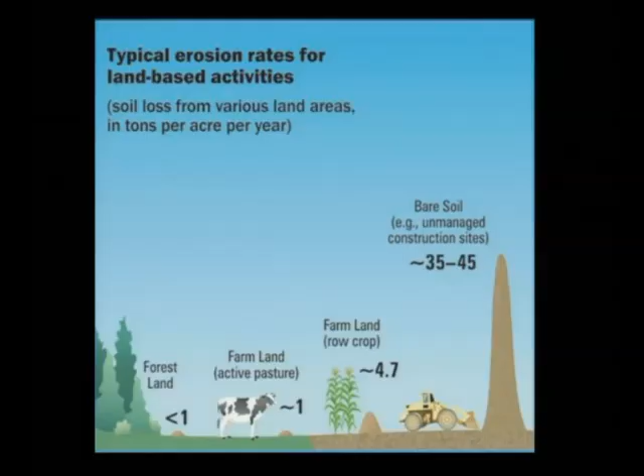What we found going forward is that this did not solve all the problems. We were seeing improvements, but it was not addressing some big problems that continued. I put up a slide here that shows typical erosion rates for land-based activities. This is something that EPA put together. And what they found is that bare soil from an unmanaged construction site can contribute large amounts of sediment into water bodies, which can contribute to pollution, impact aquatic life, that kind of thing.

So with that in mind, Congress expanded the Clean Water Act in 1987 to include stormwater runoff, specifically from construction sites, although some others were rolled into that as well. We're going to focus on the construction activities today. With those changes, it required a permit for the runoff from construction sites. Initially it was 5 acres. They phased that in and then dropped it down to 1 acre, and that's where we're sitting today. So with all of that, any construction sites disturbing over 1 acre of soil need to have a permit as required by the Clean Water Act.

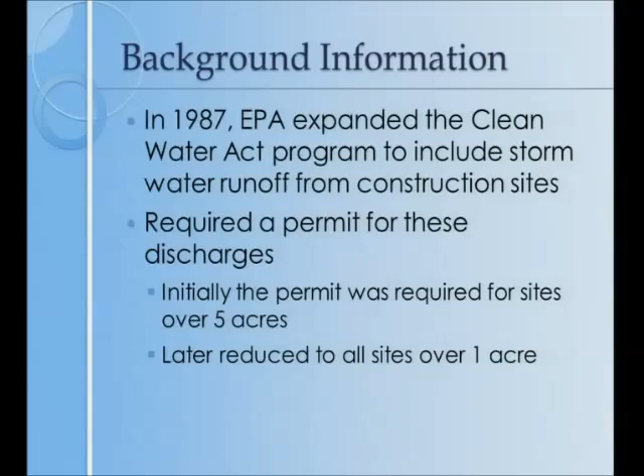One of the provisions of the Act also is that states could take over this program. So in 1993, South Dakota obtained delegation. We obtained the authority from EPA to implement this program ourselves. We felt that the state was in the best position to work with our own construction sites, our own permittees, and our public, to be more responsive to the public. We felt it was important to have that local control. So in 1993, EPA turned that program over to the state.

One of the requirements is that EPA provides oversight. They have to make sure that we're issuing our permits appropriately. And so we have to make sure that any state-issued permits comply with both South Dakota's own surface water quality standards, our state requirements, as well as some federal effluent guidelines that EPA has passed. Those federal guidelines were established to provide a uniform playing field, so that you couldn't go to one state and get a better deal pollution-wise than another state. So we've got both federal requirements we have to comply with, as well as our own state standards.

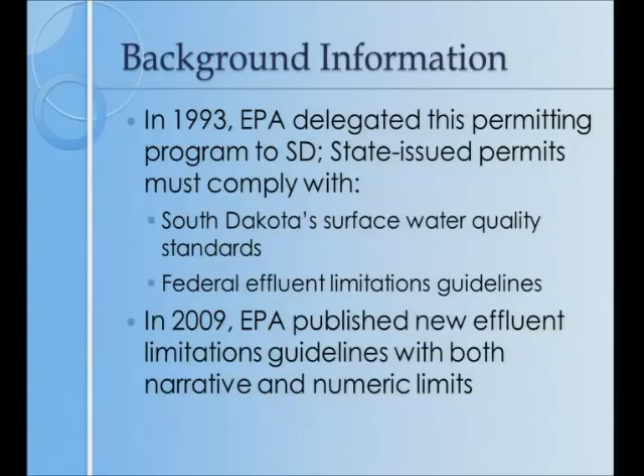I mentioned that because some of the provisions we're going to talk about today are based on one or the other. In 2009, EPA published effluent guidelines for construction sites, which included both narrative and numeric limits. EPA put some numbers that a construction site had to meet, as well as narrative limits explaining what you need to do. EPA was sued on this permit and ultimately withdrew the numeric limits, so in 2014 they finalized the narrative effluent limits. Since those are nationwide minimum federal requirements, we are required to have that in our permit.

So, in January 2015, our permit expired. We've administratively extended coverage and we're still operating under that, but we need to get that new permit reissued, and that's why we're here today. So we're in the process of reissuing that permit, and we need to incorporate those new federal requirements into our permit.

With our construction general permit, the types of discharges covered are stormwater from construction sites greater than 1 acre. It also includes construction support activities, such as staging areas or stockpiles off the construction site that have soil disturbed as part of that. It also covers a larger common plan of development - say a developer has a 20-acre site and breaks it up into quarter-acre lots. Those individual lots are under the 1 acre size, but that larger common plan of development pulls those in because they can certainly be a source of pollution.

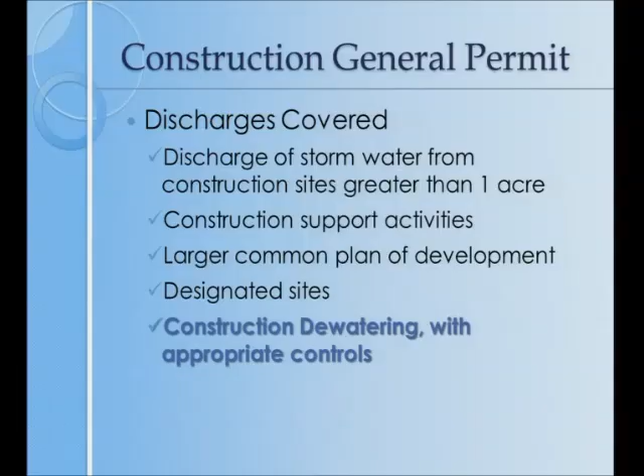The department also has the authority to designate a site, so if we see something smaller than 1 acre that's clearly causing problems, we can require that permit. We use that very sparingly, but we do have that authority and have occasionally used it. One change in this permit is that construction dewatering will be covered as long as appropriate controls are in place. That is one change from the existing permit.

Some things not covered by this permit: post-construction discharges. If you're building a wastewater treatment facility, the construction does need to be covered under this permit, but once construction is done and that treatment facility is operating, you'll have a different permit for that - this no longer covers it. This permit also does not address dredge or fill activities, such as from Section 404 permits; you need a separate permit from the Corps of Engineers for that. We're not going to authorize a discharge that would threaten water quality, or a discharge of a regulated substance such as a spill, or one that would threaten an endangered species. None of these are new - this was all exempted by the current permit, but I'd like to point that out.

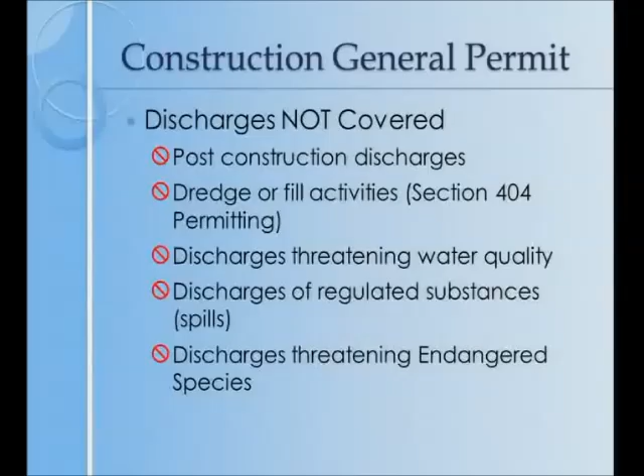Just real briefly, how you get coverage: you're required to submit a notice of intent, which is the application for getting coverage under that permit. Before you submit it, you have to have a stormwater pollution prevention plan developed. That plan is how you're going to comply with the permit at your particular site. It's supposed to be a living, breathing document that changes as construction goes on, but you need to have it developed before you submit the notice of intent.

One thing we're proposing to change with this permit is that we're going to start accepting the notice of intent applications by email. We're not going to require that hard copy any longer. I think this is a positive change - it's something we've definitely seen people requesting.

We're going to continue to require that hard copy of the application until we get this new permit in place. But at that point, what we're proposing right now is that we will start accepting them that way. So I think that's going to streamline the permitting process for people a little bit.

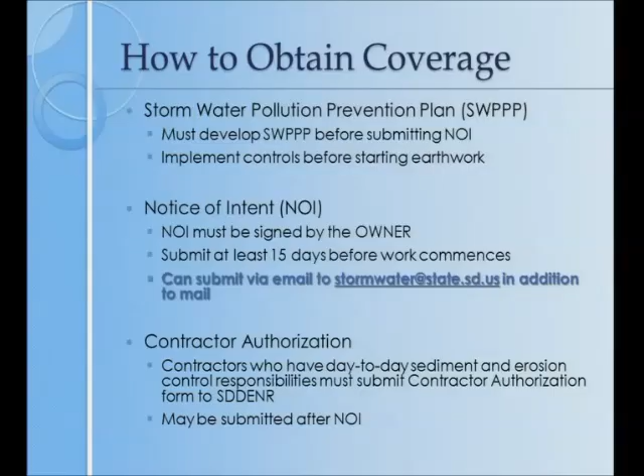Something that's been in place since the last permit, but we don't always see these come in, is contractor authorization. We want information on the contractors working on the site. They're responsible for complying with the permit, and we want to know who's out there doing the work. So we ask that you submit that contractor authorization as well.

Okay, so let's get into some information about the permit. One of the things you're going to notice is there's a blue bolded font. These are the things highlighting the changes. In a more normal font, these are things that were already existing. So that's going to be your key to look at things that have changed.

One of the things we've always required in the permit is that you post information that you have a permit, but this is not always readily accessible to people. So in this permit, we're requiring that you post information about the project, including your permit number and a contact name, at a point where it's accessible to the public, where they can see who is responsible for this site and who they can call for more information. This is a change.

Our current permit authorizes a couple of non-stormwater discharges. We're tweaking that a little bit to say that firefighting flows are the only thing covered under this permit. We've deleted the information about temporary dewatering and BMPs. The temporary dewatering is covered in a separate section, so we took that out and we're going to cover that more broadly. And the BMPs, best management practices, we expect people to be using them, so we weren't considering those a discharge anyway, which we felt was confusing. So we're just saying this is the only thing that's not a stormwater discharge but is covered by the permit.

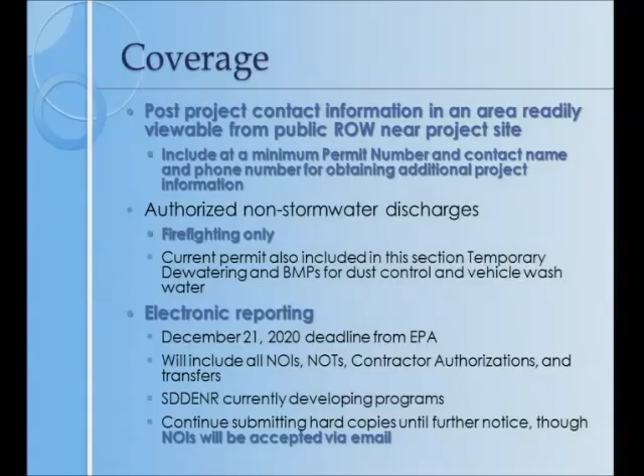We're going to need that time, but that's one of our goals, to have that in place so we can start accepting it hopefully before then. But as I said, we will start accepting the notices of intent by email to start facilitating that a little more smoothly. Okay, so with that, we're going to jump into the heart of the permit.

As I mentioned, one of the things that's required— did somebody say something? Yeah, Kelly, this is Brookings checking in, we finally got our mic working. Oh, excellent. How many people do you have there in Brookings? It's just me. Okay, great, thank you, Ray.

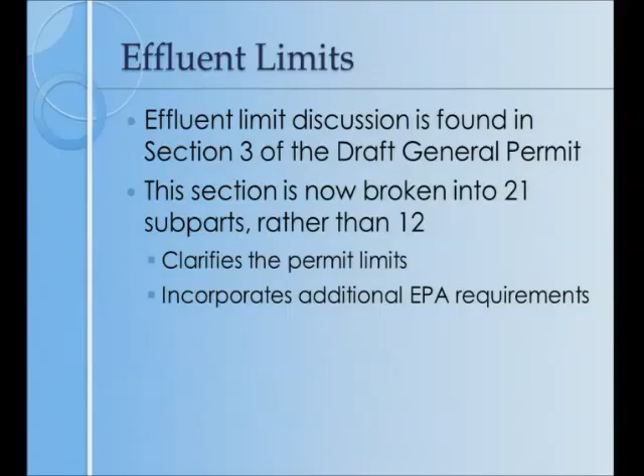The effluent limits section is found in section 3 of the draft general permit. You'll see that it's broken down into 21 subparts. I believe we had 12 previously. That doesn't mean we've got twice as many requirements now. It means we've broken out things a little more clearly in most cases, so it clarifies the limits, and then we do incorporate the additional EPA requirements.

I'm going to jump into section 3.2. I'm not going to hit all 21 today because I know I'll put you all to sleep. I'm going to hit the ones that we feel are more critical. For example, section 3.1 says you must properly operate and maintain your controls. That's always been there, that always will be there. We didn't feel like that needed a lot of further attention, so we're going to skip over a few sections that are like that and focus on the meatier ones.

Section 3.2 sets the design event, the precipitation event. First of all, it says you have to design, install, and maintain effective erosion and sediment controls before disturbing the land. So you have to have a plan in place, and you have to install them to the extent that you can before you start disturbing soil.

The current permit had a requirement, a design flow of a 2-inch precipitation event within a 24-hour period. That 2 inches actually came from the 2-year 24-hour storm event. Across South Dakota, that's roughly 2 inches, so we thought it would be more clear to just say 2 inches. Well, we quickly realized after we issued that permit that what we were really trying to communicate was a frequency and duration. So 2 inches in 15 minutes is very different than 2 inches over a 24-hour period. So we felt like we really needed to go back to that duration-type statistical 2-year 24-hour precipitation event.

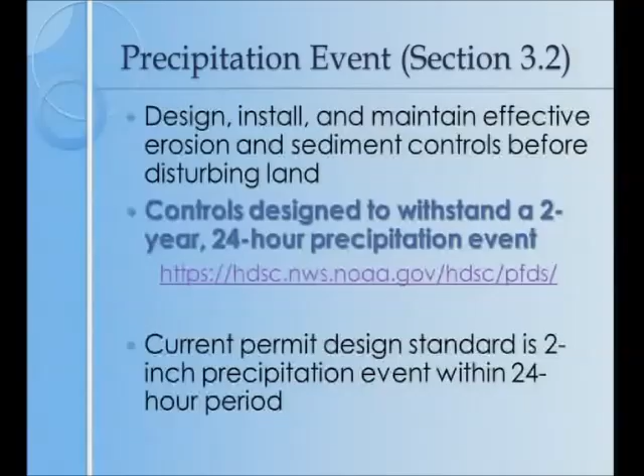But there is information on the web where you can find out exactly what that is for your site. I've got a website listed here, and I'll just show you a couple of screenshots and the information that you can get.

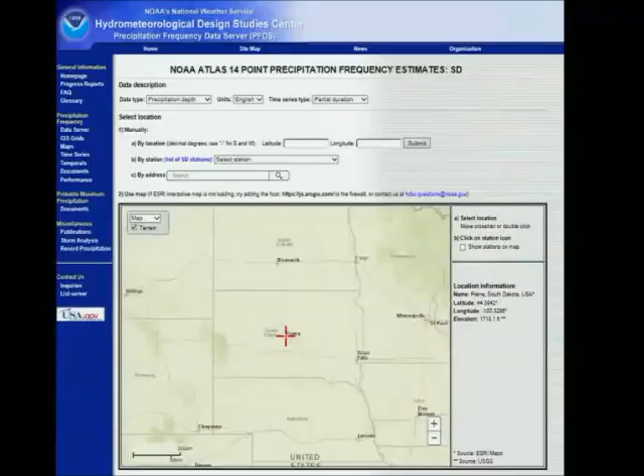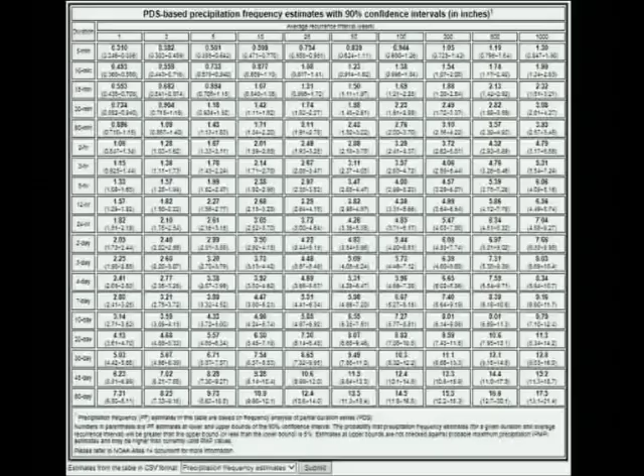This is what comes up when you hit that website, and you can select the site you're talking about. You can bring up a table that shows - do you see my mouse here, sort of? You can see down the side, it's pretty small here, but there's different durations: 5 minutes, 24 hours, 60 days. If you look at the 24-hour period and go over across the top to the 2-year event, you can see that it's about 2.1.

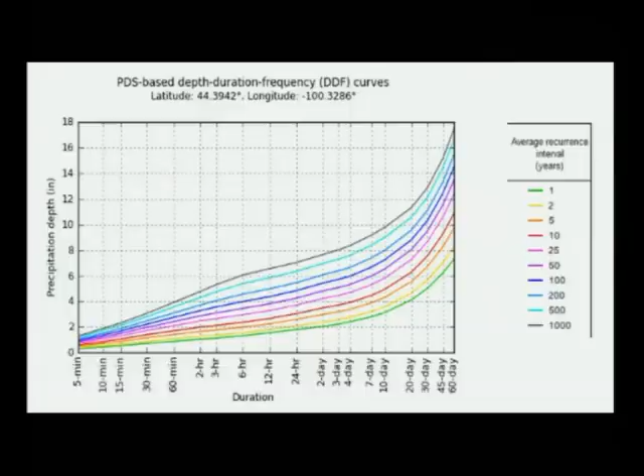Section 3.4, perimeter controls. This has been in place probably since the dawn of time with stormwater permits. This is nothing new here. You're required to have effective down gradient controls at a minimum. You have to control the site. What we commonly see are silt fences, hay bales. You need to, at a minimum, have those around the perimeter of the site to control sediment from running off.

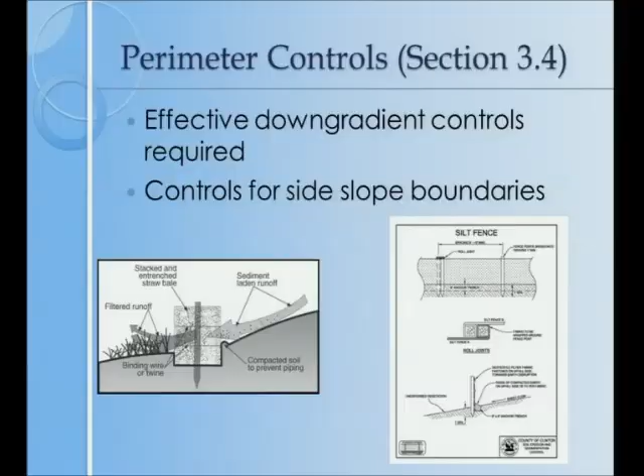Section 3.5 discusses sediment basins. We've made a change here. What we have in our current permit says that if you're disturbing over 10 acres, you must have a sediment basin. We're removing that from the permit. We heard a lot of feedback that that just didn't really make sense, seemed a little bit arbitrary, so we removed that. We do still have a section that talks about sediment basins, and we're focusing more on the design and operation of the sediment basin.

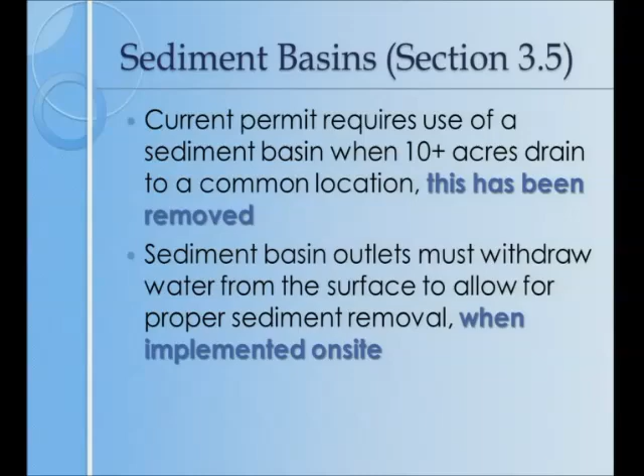But if you're going to use one as a control, we want to see you drawing water off the top. A sediment basin that draws water off the bottom is pretty ineffective. So that's the only thing that we have on sediment basins - if you're using one, this is the way we want to see you design it and operate it, so it's actually effective.

Section 3.9 talks about minimizing run-on, water running onto your site. This is one of the requirements EPA put into their federal effluent guidelines. It says you must minimize run-on to your construction site. The idea is that the less water you have to deal with, the less of a problem you'll create with water running off the site. So where you can, you're expected to minimize run-on.

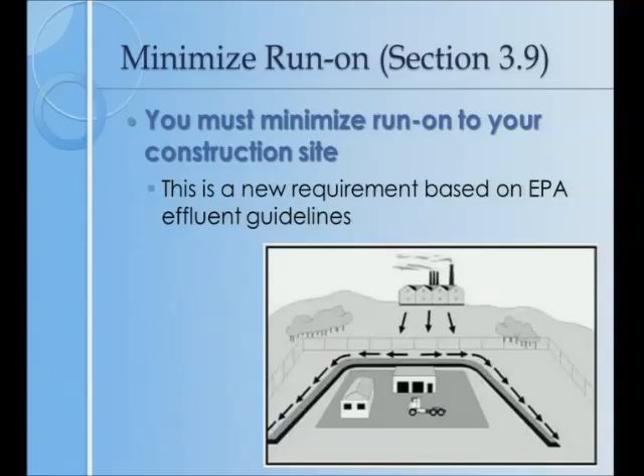Another new requirement that came out of EPA's federal guidelines is in section 3.10, talking about vegetative buffers. We've always had provisions that you should try to have a vegetative buffer wherever possible, but we got a lot more specific in this new version of the permit, since EPA has that in their federal guidelines. Right now we require that you maintain a 50-foot buffer around the site where possible, and if that's not possible, you need equivalent controls, whether that's 25 feet plus a silt fence or something like that. So whenever possible, you need to maintain these vegetative buffers.

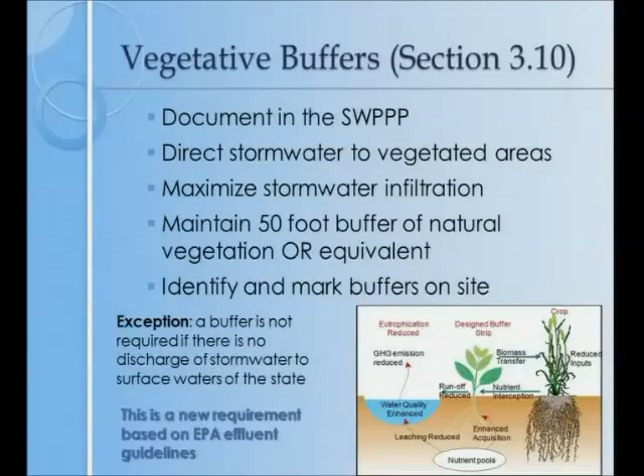There's an exception to that. If you would not have any discharge of stormwater from the site, you don't have to have that vegetative buffer if you can control the site. But this is a new requirement that came out of EPA's effluent guidelines. The 50-foot buffer was put in to dovetail with a bill passed by the legislature earlier this year encouraging buffer strips for agricultural activities, which recommended a 50-foot buffer at minimum, so that's what we put into the permit.

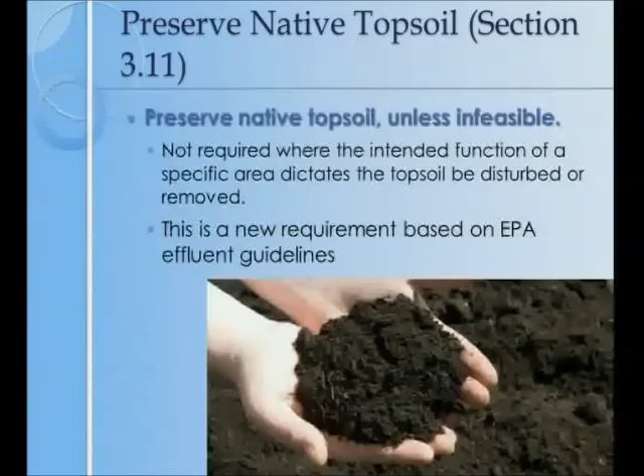Section 3.11 talks about preserving native topsoil. With this permit and EPA's requirements, there's a lot of 'where possible, please minimize to the extent that you can,' and this is a particular example of that. We want you to preserve the native topsoil unless it's not feasible to do so. This requirement comes out of EPA's federal effluent guidelines. It's not required if the intended function of the site is to remove the topsoil, but topsoil certainly provides a good mechanism to recover the site, better for vegetation, that kind of thing. So that's something EPA has in their federal guidelines.

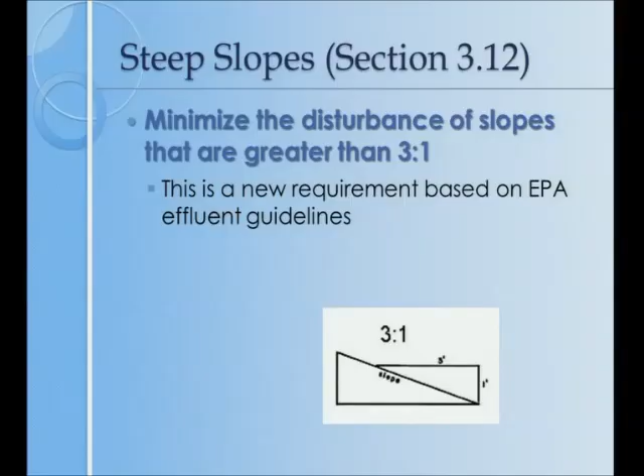Section 3.12 talks about steep slopes. We're asking that people minimize disturbance of slopes greater than 3-to-1. This doesn't mean you can't construct on these slopes, but we want people to think about what they can do to minimize disturbance, not have the entire area ripped up.

I think this is a site I've been up to a number of times. It could have been phased in a little better. So what we're asking is, if it's not necessary to rip up the whole thing at once, don't do it—phase it.

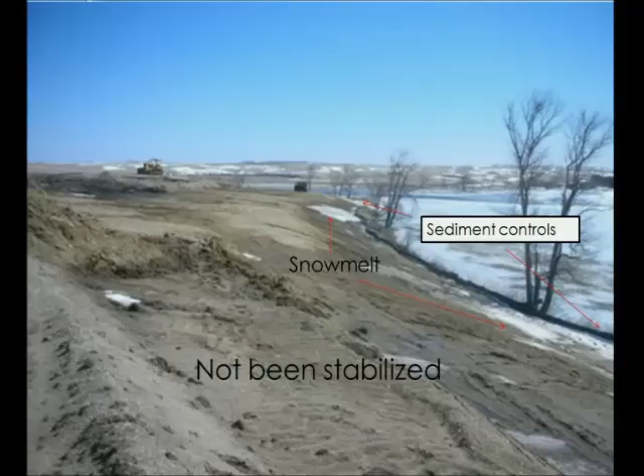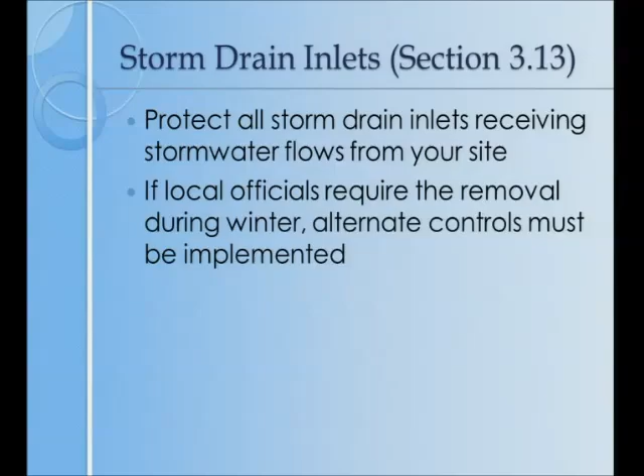Storm drain inlets—this is probably the number two thing that's been in our permit since the dawn of time. We want to protect storm drain inlets that are receiving water. I'll show a couple pictures here. When you've got water running off a construction site, especially in an urban setting, you can get pretty poor quality water running into the storm sewer, which provides a direct conduit out to waters of the state. So we're asking that you have controls in place to minimize sediment going in there and protect those inlets from receiving high levels of pollution.

Erosive velocity control. When you start managing your site to control the water better, you've got things like culverts, ditches, drains that are going to concentrate the water. The last thing we want to do is encourage people to concentrate that water and cause erosion and sedimentation downstream. So the permit requires that you give some thought to that.

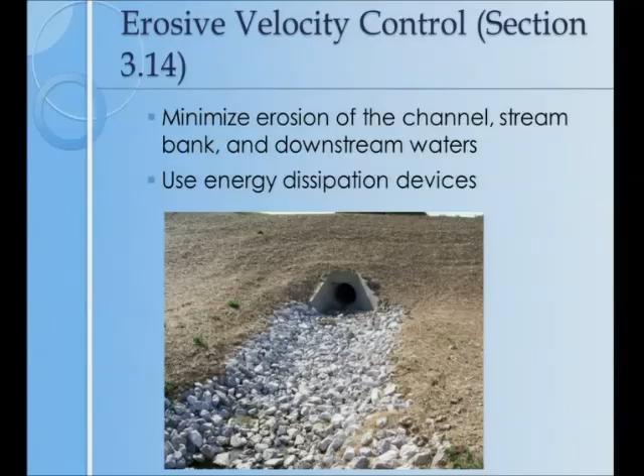While they might have been managing the site great up ahead of this, they dug up a lot of soil and sediment that was later discharged downstream. So that's an example of what we're talking about.

This is a new requirement, minimizing soil compaction. This is section 3.15.

By minimizing soil compaction, what we're asking people to do is to try to keep from pounding down the entire site. You want water infiltrating where you can. If you can get it infiltrating rather than running off, that's going to better manage the pollution leaving the site, better manage the flows leaving the site.

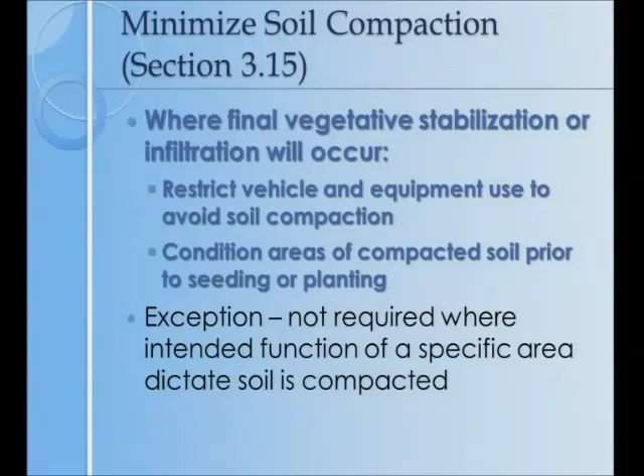However, there's certainly circumstances, whether you're compacting a road bed or building a stabilization pond and you have a liner or other foundations, footings, that kind of thing, where the intent is to compact it. We're recognizing that's an exception. But if you can control the access at the site, control equipment rolling across the site, and try to minimize how badly the site becomes compacted, that's what this is expecting, to minimize that.

Protecting stockpiles, this is section 3.17. This has been in place for a long time, again nothing new. We want to see the stockpiles located outside of the natural buffers. We're requiring natural buffers, as I discussed earlier. The last thing we want to do is see you put a large soil stockpile right on that buffer and render it ineffective. You also need to keep it out of stormwater conveyances because it's going to pick up that sediment and deposit it somewhere else.

You need to protect the piles from water running on, because that's going to cause erosion and pick up sediment. Minimize dust generation. Now, while we're not talking from the air quality standpoint, when you've got dust flowing off the site, if it's flying off the site, it could land in a waterway, so that creates a pollution issue. And then, should go without saying, but we're going to say it, we do not want to see a soil stockpile placed right in the waters of the state.

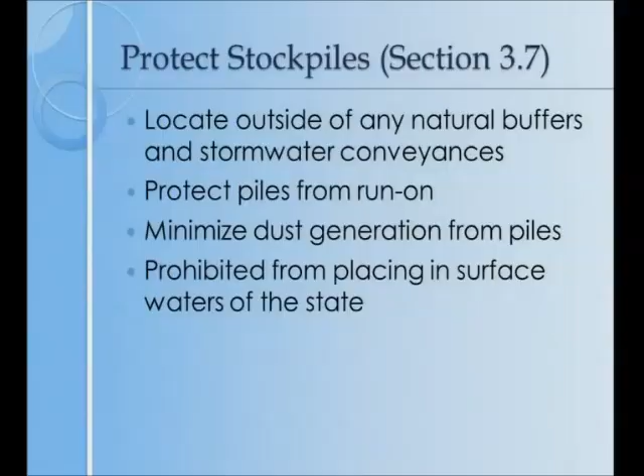Stabilization. This is kind of the final key component to what we want to see, that after you've done the work, we want to see the site properly stabilized. Again, this concept is not new in the permit, it has been there all along. What we did not have communicated very clearly is some of the deadlines in when you have to do work.

So section 3.18 lays this out a little more clearly. In the current permit, we say that if something has temporarily ceased construction for at least 14 days, you need to temporarily stabilize it. But it wasn't real clear, do you start at 14 days? When do you have to start that stabilization?

So we've got in here now that if you have temporarily stopped construction in an area and it's going to be left alone for at least 14 days, you have to start temporarily stabilizing it the following workday. That doesn't mean have it done, but you need to begin those soil stabilization measures, whether it's placing the hay, the mulch, anything like that. And then the deadline to complete that temporary stabilization is 14 days.

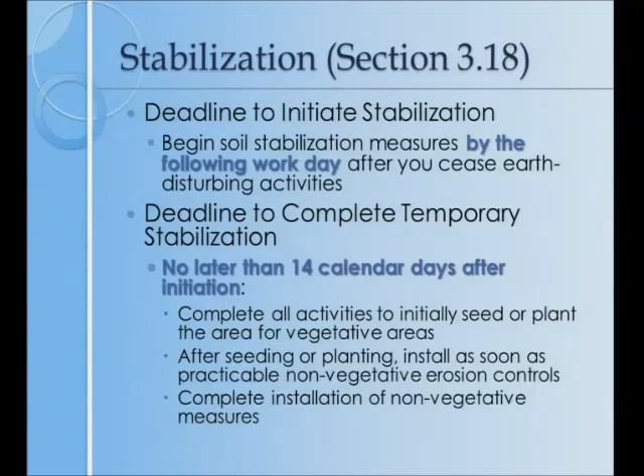So that's, and by complete it, we're talking about if you're seeding it, that the seeding is done, not the grass is growing, that kind of thing.

For final stabilization, this is in the current permit, nothing new here. We require 70% vegetative coverage of the site to be considered permanently stabilized. This is 70% of what was there prior to construction. So if it was kind of scrubby, sparse vegetation to begin with, we're not expecting it to look like somebody's Scott's yard lawn. It's 70% of what was there previously.

Or if it's more like a shopping mall parking lot that you got the concrete down, that would be final stabilization or non-vegetative stabilization. If it was ag land use to begin with, if you're building a pipeline or road through a pasture, that disturbed area once construction is completed needs to be returned to that pre-construction ag land use. All of those would be criteria to be finally stabilized, and then you can terminate permit coverage.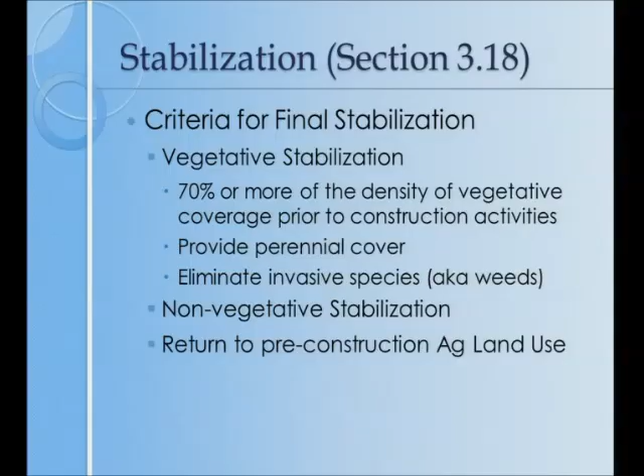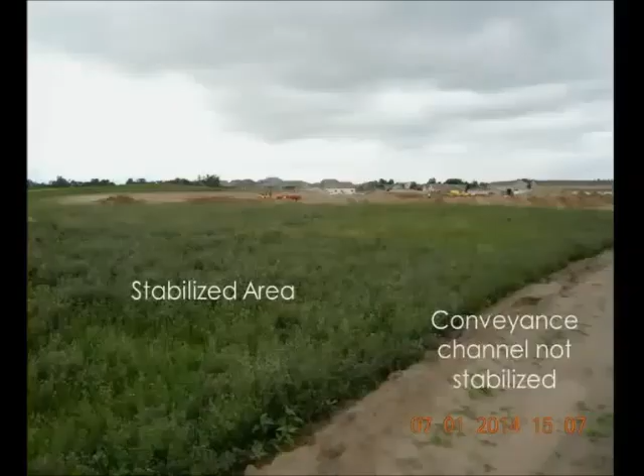Section 3.19 talks about maintenance of the controls. It's important that the controls be maintained in effective working order. It's not enough to just put them up and walk away. You have to be checking on them and doing maintenance when they're no longer working effectively.

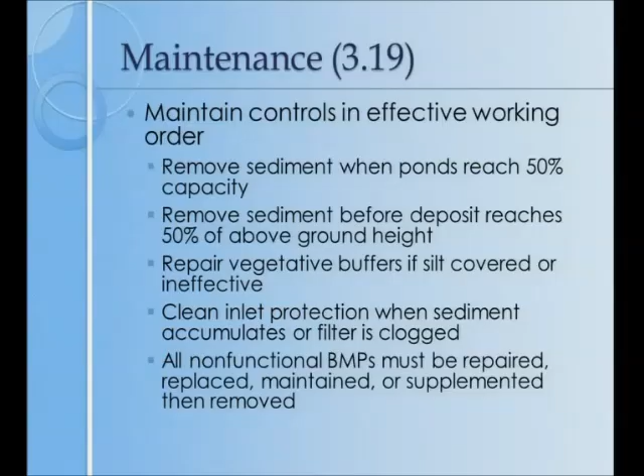The permit currently requires that you remove sediment if the ponds reach 50% of capacity or 50% up the way of the silt fence. This is not a change, that's what's in there currently. With vegetative buffers, you need to repair them if they become filled with sediment or damaged. Cleaning out the inlet protection, if you get that full of sediment, it's going to cause a flooding problem, so you need to keep that cleared out so it's not clogged up and causing different problems. Any other non-functional best management practices have to be repaired, replaced, maintained, or supplemented so that they continue to get good control at the site.

Now the deadlines for this we've laid out a little more clearly in the permit. Maintenance on non-effective controls must start within the same working day that's identified. You need to repair and stabilize eroded areas by the end of the workday or implement alternative controls. Now if for some reason that's not possible, if it's a major blowout, completely ineffective, you need to document that in your SWPPP why you don't get it done that same day. There may be exceptions, but our expectation is that you're going to start correcting those as soon as they're identified. If you need to completely install a new control, you have up to 7 days or until the next storm event, whichever comes first. And as always, anytime you make changes on the site, we want to see that reflected in your stormwater pollution prevention plan, your SWPPP.

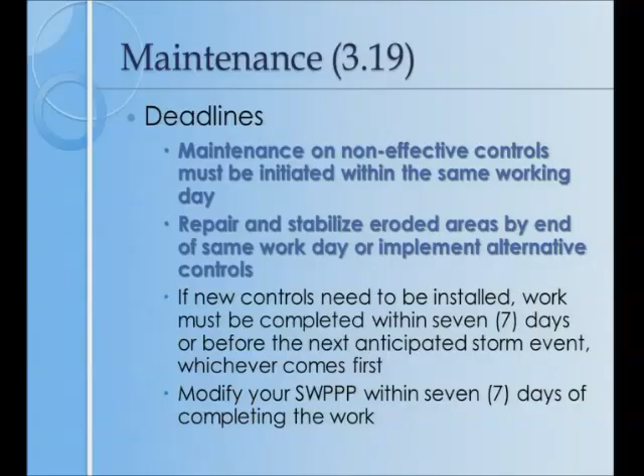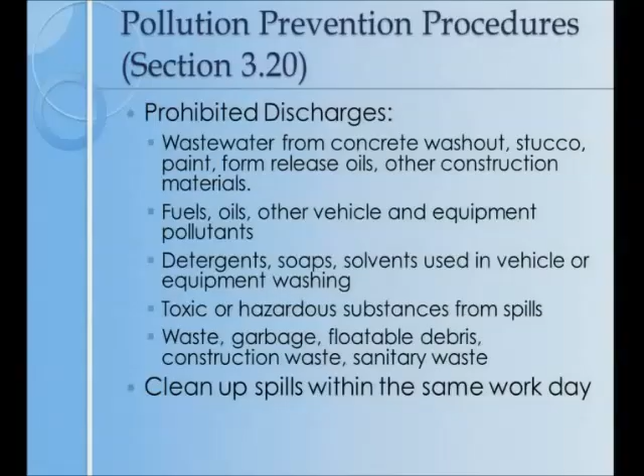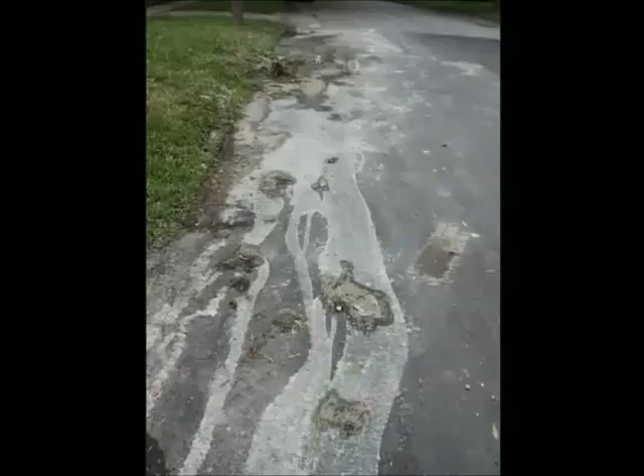Here's another example. Looks like it's probably a concrete washout here, causing some staining and washout, possibly reaching a storm sewer.

As I mentioned earlier, construction dewatering is now going to be covered by this permit. More clearly, I would say it was all along, but there's been some confusion both within DENR as well as in the regulated community. So we want to state really clearly in the permit that construction dewatering is allowed if you have controls in place, if it's part of your pollution prevention plan.

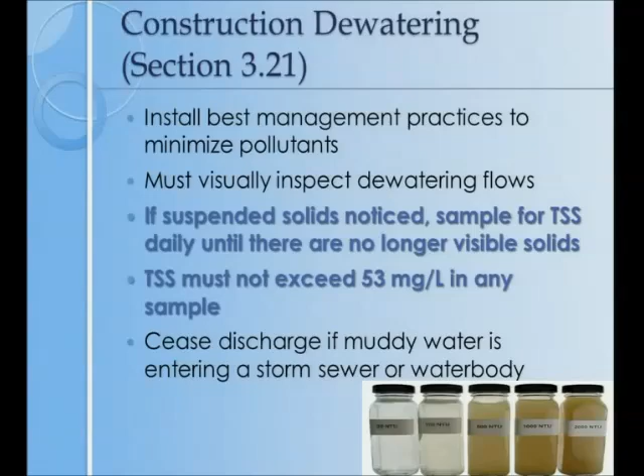We also say you have to be out there visually inspecting those dewatering flows. And if you see muddy, dirty water, you have to stop the discharge, and you're going to have to sample until the water's clear or until you can reach that 53 milligrams per liter for total suspended solids. That sampling and those limits are consistent with a different permit we had, our temporary discharge permit required for construction dewatering. We're rolling those requirements into this. So while it's not a change in our expectations, it is a change in what's in this permit. But it'll allow us to cover those construction dewatering flows with this permit.

Okay, that pretty well goes through the effluent limits. We're going to hit a few other things here real quickly. The permit does require site inspections. This has been in the permit all along, nothing new there. Section 4 talks about that. You're required to do an inspection every 7 days.

One thing that we are changing is the rainfall event. Within 24 hours of precipitation of a quarter of an inch - we're proposing to change that. I believe it's half an inch now, or a snow melt that causes surface erosion. We're requiring people to maintain a rain gauge on site so that they know how much water they received. I'm sure anybody here knows South Dakota, you can be across the street from somebody and get a different rainfall event. So we're going to require people to maintain a rain gauge on site.

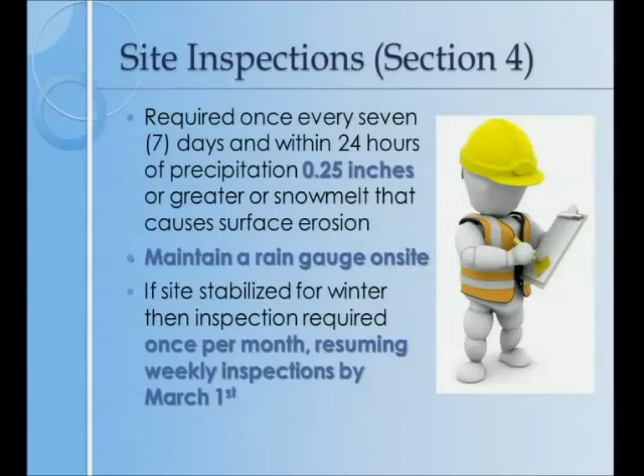If you got the site properly stabilized for the winter, then we roll back those inspection requirements to monthly, and you have to resume the weekly inspections by March 1st. This isn't a huge change from our current permit, but we're specifically stating that March 1st date now. I don't believe that's in the current permit.

What you have to look at when you're doing site inspections: we want you looking at disturbed areas, looking at the erosion and sediment controls to make sure they're effective, documenting any problems that you see, looking at your vegetated buffers and your stockpiles, and looking at areas where stormwater typically flows on and off of the site.

We want you looking at the entrances and exits at the site and any storage areas. We did put in there specifically that this is a change, but I think it was hopefully understood all along, we just felt it needed to be clearly stated in the permit. If it's not safe to inspect a site because of the work occurring there, if you can't do your weekly inspection, document that in your inspection report - that you couldn't and why - and try to get back out there as soon as you can. But we did want to recognize that there may be unsafe situations where you can't look at every site every time.

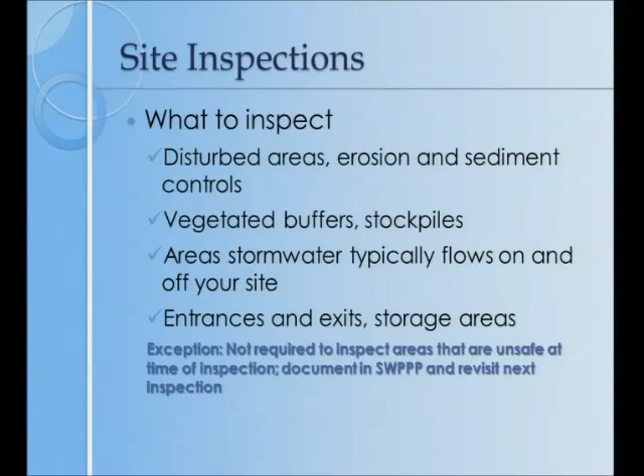Other things you need to look for: any sediment or pollutant discharges, any signs of erosion, scouring at downstream sites, sediment deposits both on and off your site. You want to look and make sure your controls are working correctly as per your Stormwater Pollution Prevention Plan - should be 3 P's, not 4, I got too many P's there.

That's a real critical thing, we can't emphasize it enough - when you're out there doing the inspections, that SWPPP is supposed to be a living, breathing document. It's supposed to change as site conditions change. Those inspections are your way of looking to see if things are working and what you can do better at the site. A lot of times something looks great on paper, doesn't necessarily work on the site. We understand that - make those changes.

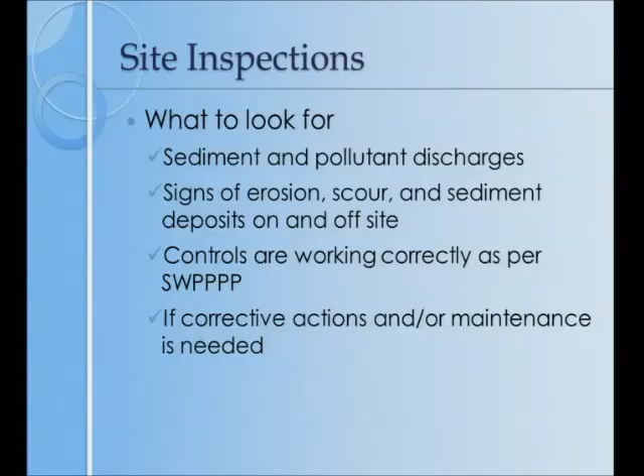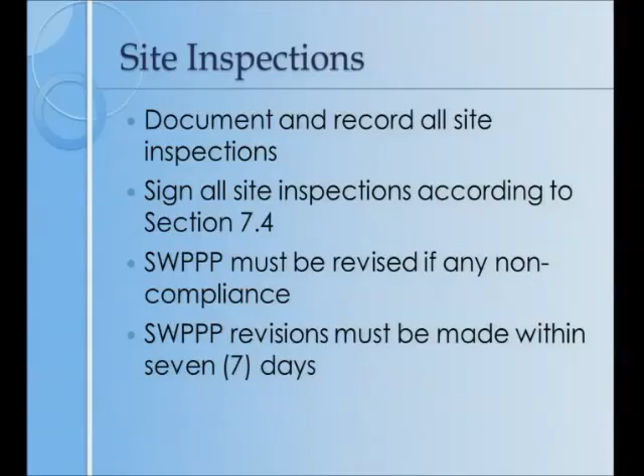Then document if you needed to do any corrective action or maintenance, and if that was done. You need to document and record all of your inspections. We actually require a certification statement that what you say in your report is what you saw on site - you're certifying that. You need to, I'll emphasize it one more time, revise it if there's any non-compliance, and you need to make those changes within 7 days.

A couple other things that I didn't really focus on with the SWPPP here. Basically with our SWPPP, we want to see you developing that to make sure you meet those effluent limits that we spent time talking about. But I would like to highlight a couple of things that we want to touch on.

Under the Clean Water Act, one of the things that the state is required to do is identify water bodies that are impaired, meaning they're not meeting those South Dakota surface water quality standards. When a water body is impaired and not meeting its beneficial uses, we're required to have what's called a total maximum daily load, an analysis of what's causing the pollution, how much pollution is out there, and what needs to be done to bring that pollution level down to where we're meeting our standards.

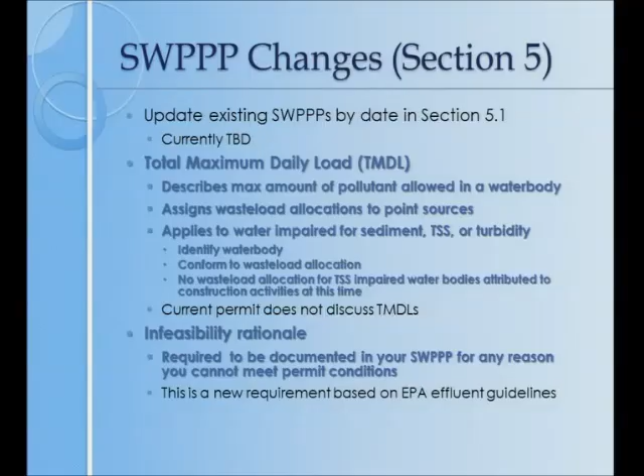But we expect you to make a good faith effort and comply with the permit, and document if there's something out there that's not reasonable. This is actually something that was provided in EPA's federal regulations as well, their new federal regulations.

Finally, DENR does try to get out and do inspections at as many sites as we can. So if you've been chosen - one of the chosen ones - to get an inspection, we thought we'd touch real briefly on what we look at when we go out to do an inspection.

We're going to look at your records. Do you have a stormwater pollution prevention plan? That's absolutely key. If you've got a permit, you better be able to show us something that you have a plan - that's the heart and soul of the permit. So that's the number one thing you better have on site that we're going to want to look at. We're also going to want to look at your inspection records and those certification statements that I talked about, that you've done the inspection and you're documenting what you saw out there.

We're going to want to walk the site. We're going to be looking at your erosion and sediment controls, the kind of things you should be looking at in your own inspections every week. We're going to be looking at the entrance and exit sites of the construction site to make sure you're not having to track out, that you've got a stabilized site that's not going to be causing more problems as equipment rolls in and out. We're going to look at the conveyances you have for taking stormwater off the site. Are you causing erosion downstream?

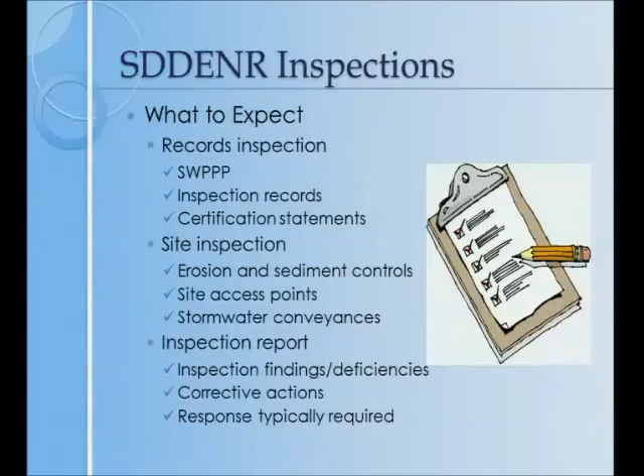We will put together an inspection report documenting our findings, discussing any corrective actions, any other follow-up that you need. Typically we're going to require a response. If we saw problems out there, we're going to want to see you respond to what you did to address those. If we saw some real significant issues, we'll probably schedule a follow-up inspection and/or ask you to submit a copy of your SWPPP with the revisions.

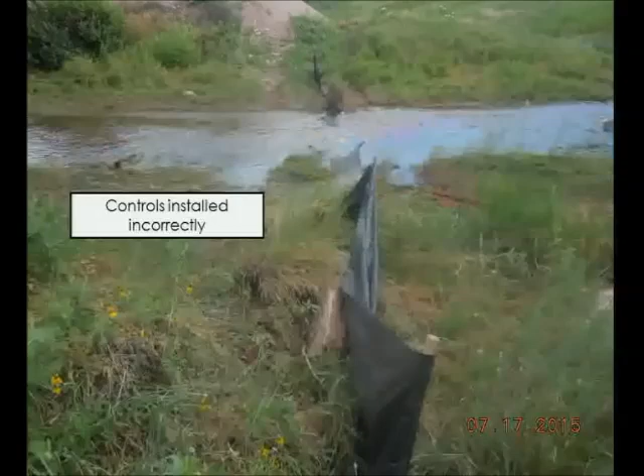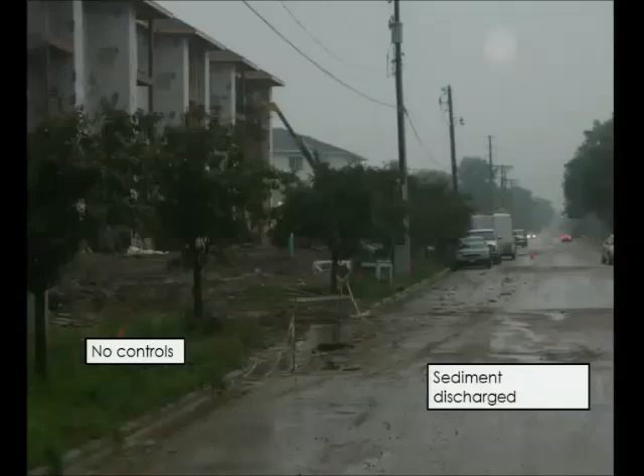Already kind of showed you this site here. Here's an example of an urban setting where it was a very small construction project, but they didn't have a stabilized access point, and as a result sediment's getting drug off the site. We've got a bunch of mud out in the street, and even just this very small site was causing a fair amount of pollution coming off the site.

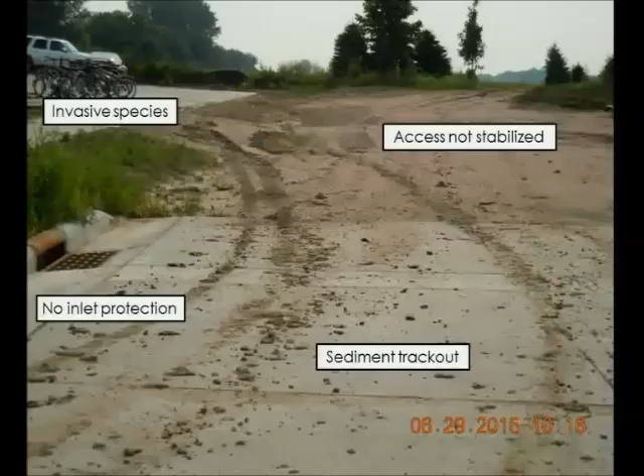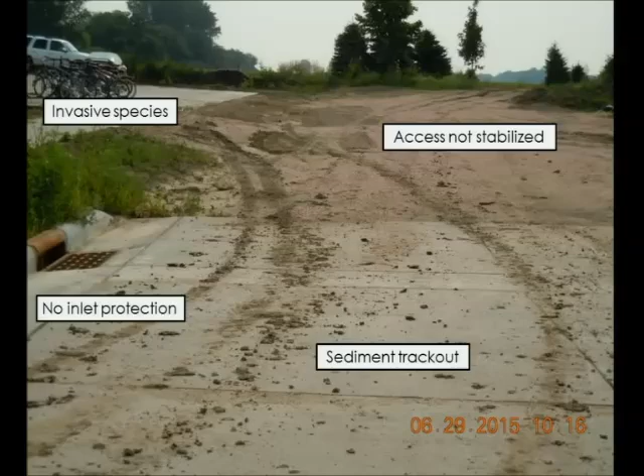Another example of something that did not have the access site stabilized. Didn't really talk about it, but the permit says that when you're establishing a vegetative cover, we expect an appropriate vegetative cover. Invasive species would not fit that requirement. That's kind of what we found on this site. They didn't have any inlet protection. Sediment was being tracked out of the site.

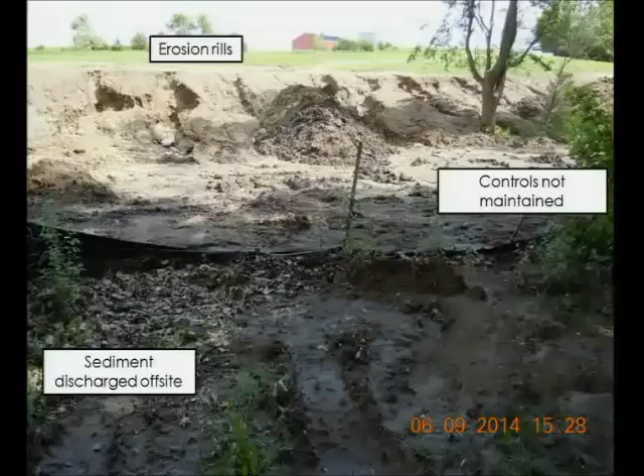Here's another example of a control that's not maintained. You can't really see it, but there was a silt fence there. It's laying down. There's some erosion rills, and sediment was discharged off the site. So that's the permit. That's a little bit on what we expect when we go out and do inspections.

So I want to talk briefly on our next steps with this permit. We have the permit out right now for informal comment. When we issue a permit, we have to invite public comment, and for at least 30 days we have to specifically respond to every comment, and if we make changes we have to republish notice of it. So with a permit that affects this many people, that is statewide, what we wanted to do is put it out for informal comment first, where our process is a little bit easier to have a dialogue on what the permit requires and what doesn't make sense, what isn't working for people.

So we've got this informal comment period open right now. We'd like to have any comments by the end of the month, by October 31st, on things that you don't like, things you think we need to do differently. We'll take that all into account, make changes, and put it out for formal 30-day public comment in all the daily newspapers in South Dakota. We're hoping to do that before the end of the year. It'll really depend on just how extensive the comments, the feedback that we get on the permit.

Like I said, we've already started getting some comments, and we're going to start reviewing that. We've gotten some good feedback. We've found that this has been a really effective way to head off concerns, to hopefully make a permit that makes sense. Something that sounds great while I'm sitting in my ivory tower in Pierre doesn't always make sense when you get out in the field, and we need that feedback to have a permit that works for you. So that's the process going forward. Once we complete that 30-day comment period, we'll be issuing the permit, and we'll notify anybody currently covered that they're now covered under the new permit.

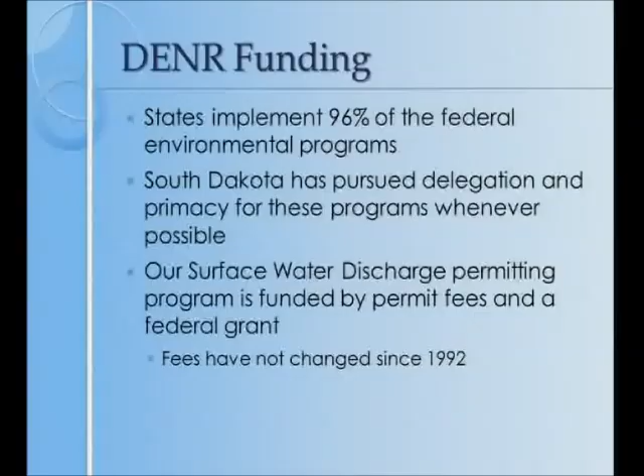As I said when we started today, we felt it was important to have that delegation, that authority to do the program, and we wanted to keep local control to the extent that we could. So we put those fees in place, we took over the program, and then the federal grant we get - like I said, fees haven't changed in 25 years, and our federal grant has actually started to level off as well.

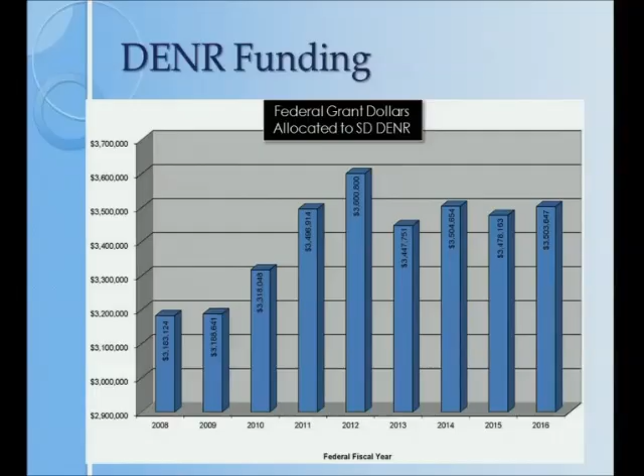So with our fees not changing - we don't charge fees for stormwater permits - and with our grant funding seeming to go down, we've found ourselves over the last couple of years with money pretty tight within my program. Over the last year, I've had between 3 and 4 vacancies because I haven't had the funding to replace those positions. What we've been looking at is how do we deal with that?

We've been trying to cut our own costs, not filling positions. We've pursued one-time grant money from EPA where we could, but that hasn't allowed us to keep our head afloat. Now we're also hearing that President Trump is proposing up to a 40% cut in this grant we rely on, which is going to be kind of the death knell for us to continue.

So the two basic options we've looked at are: no longer doing the program here in South Dakota, turning it back over to EPA - that is definitely not my preferred option - or changing our fee structure, which is what I'm here to talk about today. We're looking at changes to several of our fees, but specifically implementing fees for the construction permits we issue.

We are putting together a bill that would authorize us to charge fees on construction projects. What we're proposing is to base that on the size of the project. For smaller projects, less than 5 acres, we're proposing an annual fee of $100 per year.

That fee would be in place while the project is in construction. Once the site is complete and stabilization is done, that fee would stop. For larger projects between 5 and 50 acres, we're proposing a fee of $250 per year. And for sites greater than 50 acres, we're proposing a fee of $750 per year.

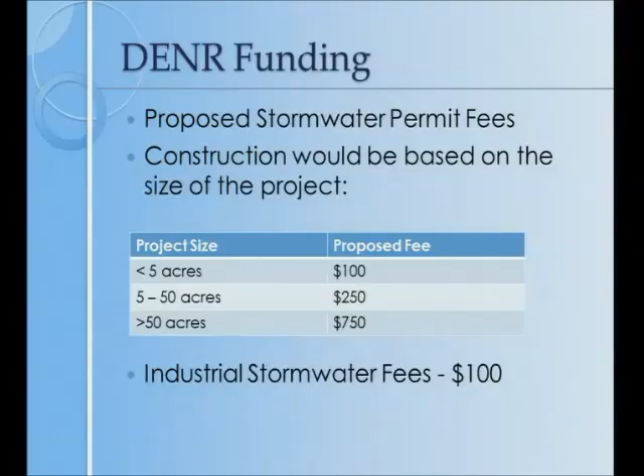With these fees, along with some of the other changes we're looking at, if we're able to implement those fees, we would be able to fully fund the program and keep it here in South Dakota.

One of the first things people ask me is, okay, I'm getting it for free now, what am I going to get if you make this change to charge us fees? As I said, we're required to get things online, and we've been working on that for several years, working with our computer people, our Bureau of Information and Technology.

They have been working, unfortunately, at a very slow rate because I don't have much money I can put towards this project. So while they are working away on it, I hope we'll have it in place by 2020. If we had funding to put towards this, we could get it in place much more quickly. I think that's going to be a benefit to the people that deal with these permits, to have online permit application and online reporting available.

We also receive requests for technical assistance and training on what's required under the stormwater permit. The Department of Transportation is doing a great job out there. They require training of anybody doing one of their projects. We've gotten to the point with my staffing levels that I'm having trouble even providing a staff person to talk about our permit in this training.

So at a minimum, DENR needs to be able to put more resources towards DOT's efforts. And what I'd like to see is that we expand that training and make it available beyond just DOT, whether it's partnering with DOT or putting together something similar for everybody. So we need to do more in that area, and that's what we hope to do with the resources from these revised fees.

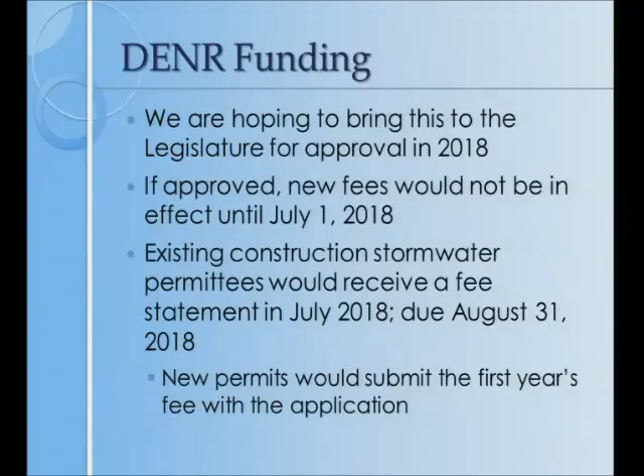So with that, I'm going to stop talking for a few minutes and open it up to questions. I'm going to go ahead and start with Pierre, since that's pretty much where everybody's at. Anybody here in Pierre have questions?

Lori: At the very beginning, you said one of the new proposed changes is that we would have to post project contact information in a viewable area after the project was done, with project permit information and contact information. How long would we have to keep that up?

It would not be after the project is done, it would be while the project's going. When the project's done, that would come down along with everything else. I tried to find a way to reword that since it said post-project — what I meant is you need to post project information while it's going, not after. Thank you for that clarification.

Any other questions?

You hit briefly on the contractor authorization letter that's required. DOT currently submits that after our pre-construction meeting, after we've applied with the NOI to get the permit. Is that process still going to be the same? Yep, that's acceptable. A lot of times when people are first putting in their notice of intent, they don't even know who the contractor is going to be, and that's certainly the case with DOT. Once you know who the contractor is, we want to see that come in. So what you've been doing is fine. Sometimes people know it right up front. It can come in with the NOI, or it can come in once you know.